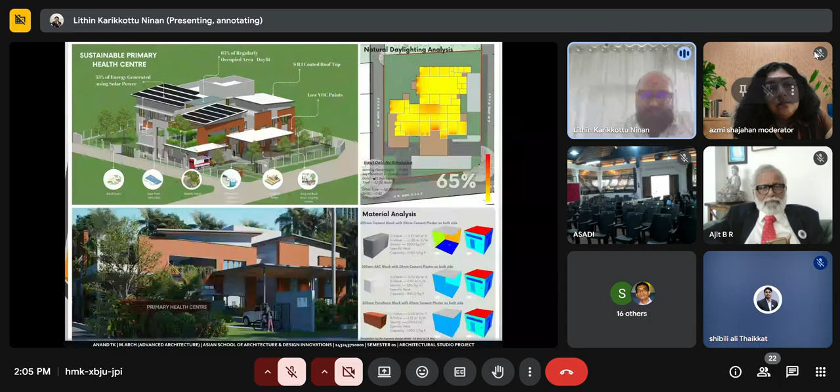In the second semester, it was more about designing the Cochin Muziris Biennale Pavilion. Our design brief was to design something recyclable and disassembled. In that semester we focused on computational design and parametric tools, where we were able to play with our form and try out different combinations in Rhino and Grasshopper.

So these are certain imageries of what we have done, bits and pieces of the works. I am handing over to Basil, he'll be presenting the rest.

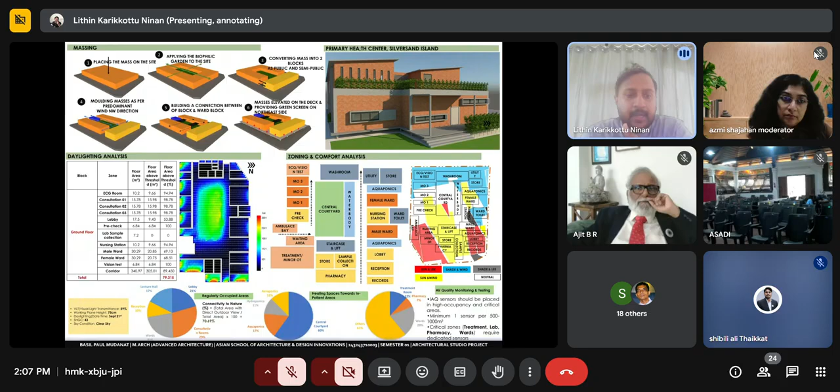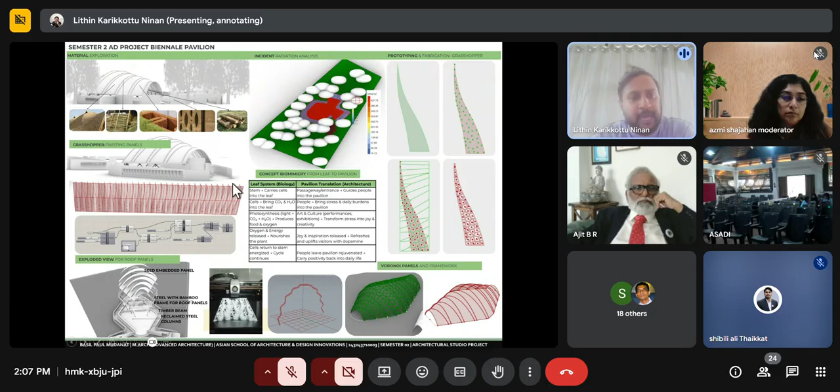This is the second semester project, the Biennale Pavilion, focusing on disassembly and using sustainable materials. As you can see here, the materials were thatch, bamboo, seed-embedded panels, and timber paneling. For the parametric area, I used Grasshopper to create twisting panels where visitors can go through and enjoy them. And these are the Grasshopper scripts.

Coming on to the incident radiation analysis, where the site is daylit or not. So my roof was red in color, where I have provided the Voronoi panel system as the parametric design. My concept was biomimicry, from leaf to the pavilion. As you can see here on the right side, which is prototyping and fabrication, I have divided the roof into 17 panels, placed as seed embedded panels.

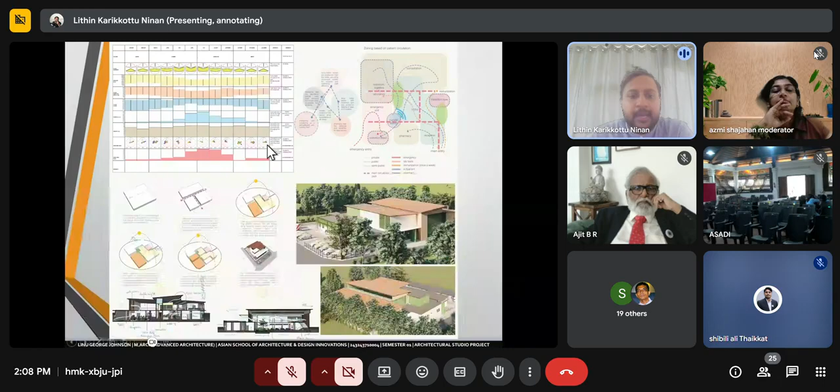So this is one of our students' work. As you can see here, the echo chart for the site analysis, we have used daylight and ventilation strategies for the design. For the IGBC criteria, we have used comfort analysis and CFD, computational fluid dynamics, and daylight strategies, and water demand and power demand.

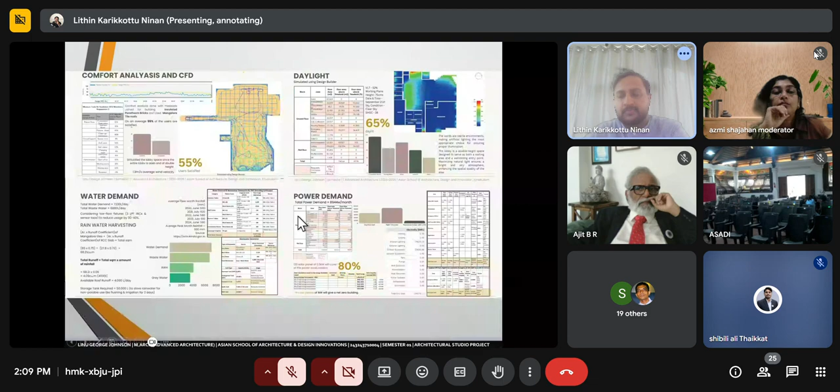So myself, Lithin, a recent graduate from B.Arch from ASADI itself. I joined the M.Arch program immediately within the span of 1 month. It was a huge step up with respect to my classmates who are much more senior to me.

With respect to the projects we started in the first semester, we dealt with the urban primary health center. We used simulation softwares like Autodesk Insight as well as Design Builder to simulate existing conditions with respect to climate, temperature, precipitation, as well as design development based on a sustainable aspect. In terms of sustainability, we looked upon the carbon neutrality of the building, and the amount of solar panels that can be achieved.

All this analysis we derived from the simulations. Carrying over to the second semester, it was an integration of sustainable practice within the domain of parametric tools. We came upon new tools like Rhino and Grasshopper, designing starting from geometrical aspects, even the zoning aspects, with parameters set based on constraints. This is how the conceptual development is made, trying to develop a framework, so the design is not just lines and curves but based on these inputs. Then iterations are carried forward throughout the entire process. The entire structure was developed using Rhino and Grasshopper, as well as simulation tools within Grasshopper like Honeybee and Ladybug, to simulate the required temperature.

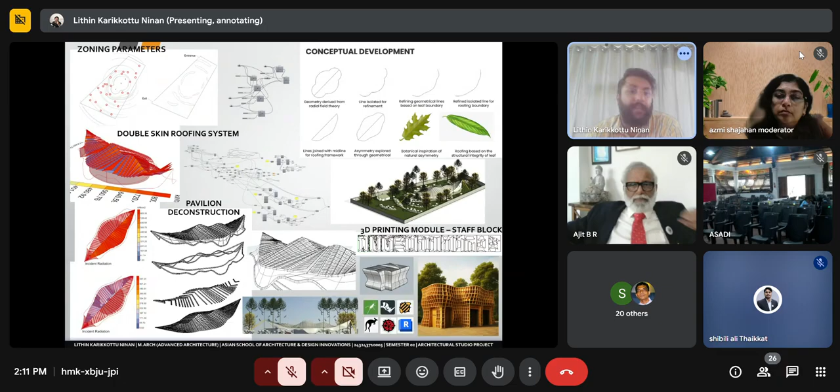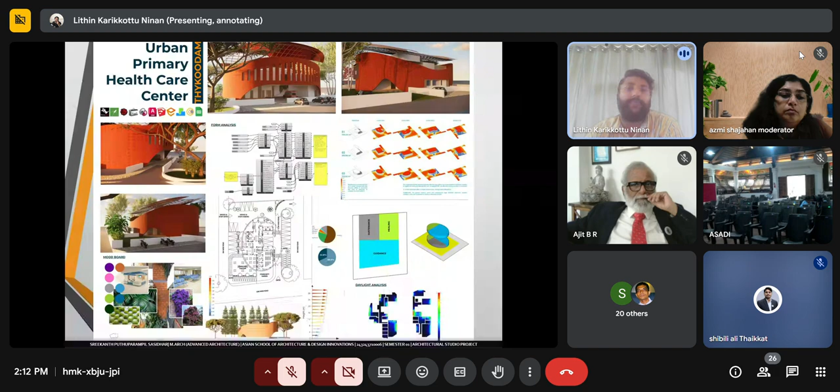Now this is another of our classmates' work, Mr. Sreekanth. He developed the primary health center based on aspects from Grasshopper as well as AutoCAD. With respect to that, thermal analysis was also created, as well as the truss system developed within Grasshopper.

This was a recent project where we had to develop the facade for our institution, ASADI. It had to be a combination of facade plus student pavilion with respect to smart materials integration. I carry forward to Azmi for the rest of the presentation.

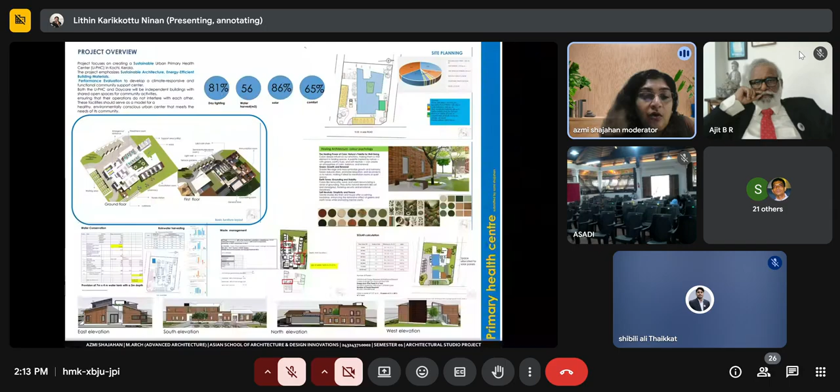Can you please go to the next slide?

This was our second project, a pavilion, the Cochin Biennale Pavilion. We had a process where the whole thing was looked into with a literature study, then a live case study. We had to make inferences on it, then get into understanding the site, which was the Cabral Yard in Fort Kochi, because it has a historical context. Please go to the next slide.

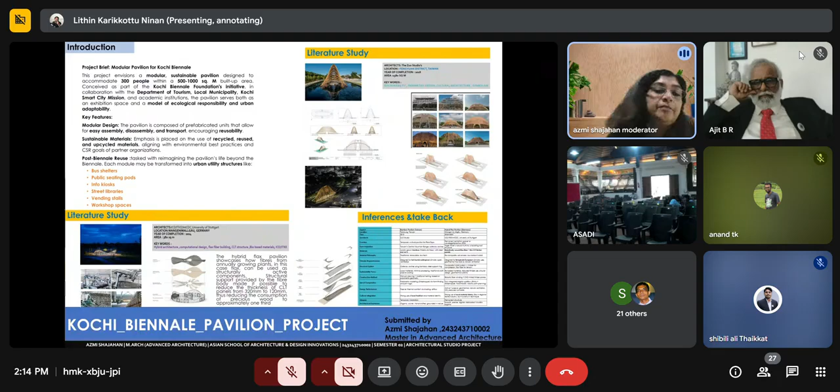So the site analysis was done using parametrics, Ladybug was used for the site analysis, and then after that we worked on our concept. The concept I had taken up was of a millipede, and you can see how we integrated biomimicry to make the form.

So in this one, the parametric basic form of the millipede is what I took as the basic concept. I had those shell structures made with 9 panels, and all 9 panels were scripted using Grasshopper.

The good thing about this parametric design is that you have the flexibility, unlike SketchUp, to move all the panels in whichever direction you want and orient the building in the right position. So you have scripts that enable us to find the positioning of the building on site, using something like Galapagos.

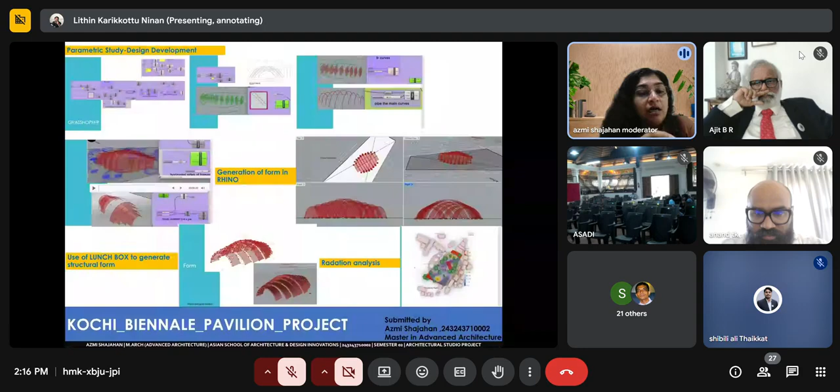So these are some rendered images which I did in Enscape after the whole form was done. This was basically a pavilion which can be disassembled, so it was to be made with sustainable materials. Jute was looked into, so we had to do a little bit of research on the material aspects of it.

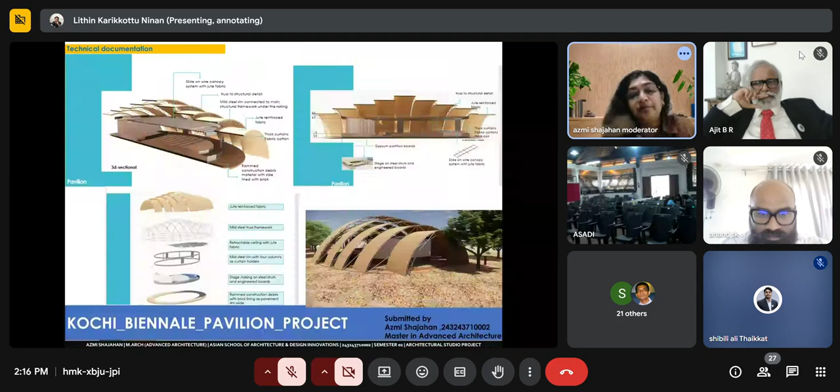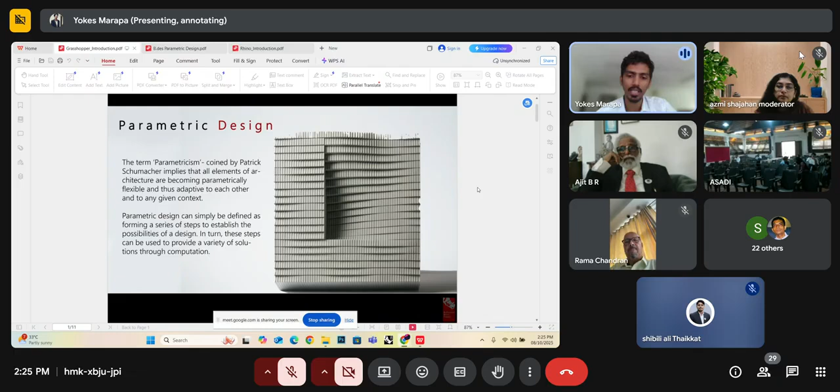So that's where parametric design comes in. Like I said, it's not a newer term. Since there wasn't already a community, it wasn't actually given a name. Patrick Schumacher, who coined the name called parametricism, is one of the partners of Zaha Hadid. He recognized the community, and gave it the name, saying we have a community and we have to put it forward, make it visible for everybody, something like that. And that's where parametric design was born.

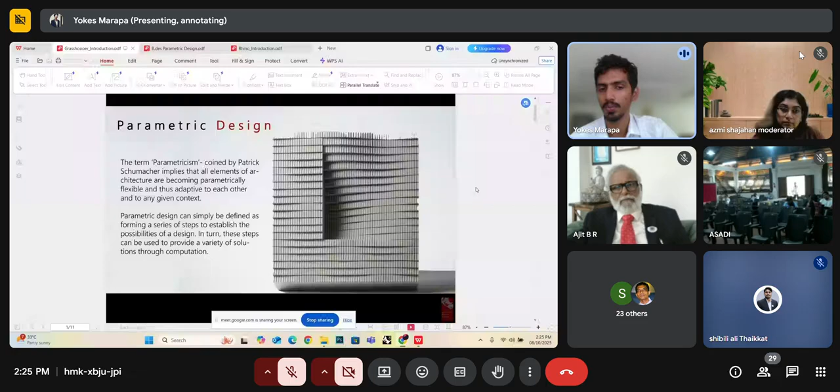So we'll see how it has been traditionally made. We have our conventional type of designing, and a parametric way of thinking. So what is our conventional way? We get our design problem, we make our site analysis, gather literature studies, case studies. Then once everything is done, we go for standards and everything. We get the design problem, work with the conceptuals, make 2 or 3 iterations of the same design concepts. Then when everything is approved, we go for the approval drawings, and then construction.

But when it comes to parametric thinking, the amount of data you're getting is always more like a variable. Maybe the same amount of temperature you record in a single day is not the same on another day. Maybe in summer you record a lot of radiation, and in winter you record very less radiation but more wind. So for a single year there will be a lot of change.

It's not static, we can say. So we have a choice, sort of. Either you can have an optimized solution for everything, maybe a single solution, or you can have a variable solution. Maybe for the first 6 months, the window will be facing this sort of direction, and the other 6 months it will face another direction.

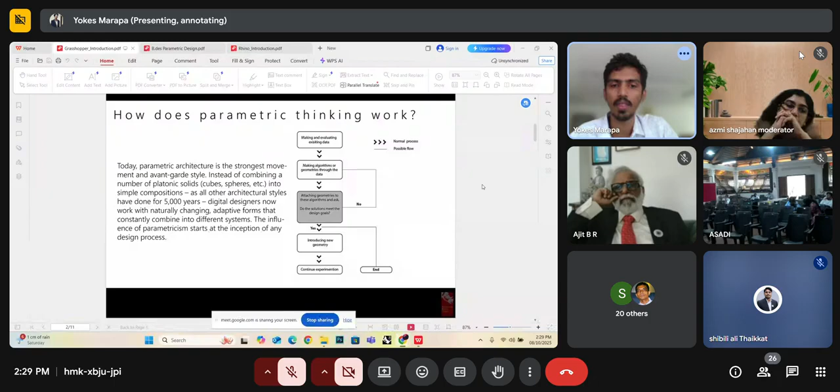What are the different types, we can say? There is constraint-based, propagation-based, and generative-based. Constraint-based is our typical conventional style, and propagation-based is where we use parametric tools like Grasshopper or Dynamo.

Some parametric tools support our design workflow. Generative systems are like when you go toward the AI field—you give all your parameters to the system, along with all the data, and then ask the system to give you the optimized solution. The system analyzes using its own machine learning, and they have their own neural system.

So it's not like they have their own—we have to train them. There are different systems helping these generative systems. So we train the system first, and give it all this data. Once that's done, you can get all those generative forms and so on.

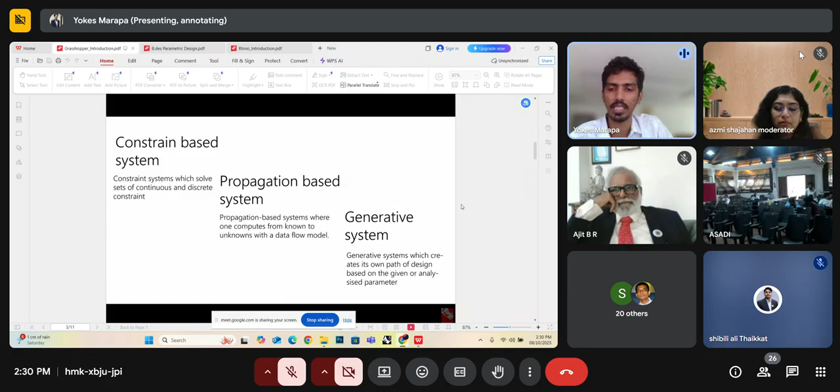And what are the tools now? It basically depends upon the market—every system has its own tools, every company has its own form of parametric design. McNeel has Rhino and Grasshopper, CATIA is from Dassault Systemes, Autodesk has Revit and Dynamo, and Blender also has some parametric capabilities. Houdini has some parametric work, and Fusion 360 has it too.

So every company started to adopt parametric work since it breaks our regular conventional form of designing, and gives more flexibility for designers to rework their design and reimagine their forms. Using the same traditional construction methods or fabrication techniques, what if you could go a step further? Since the fabrication industry has grown a lot, you can now make any type of organic shapes. So many different tools have been formed.

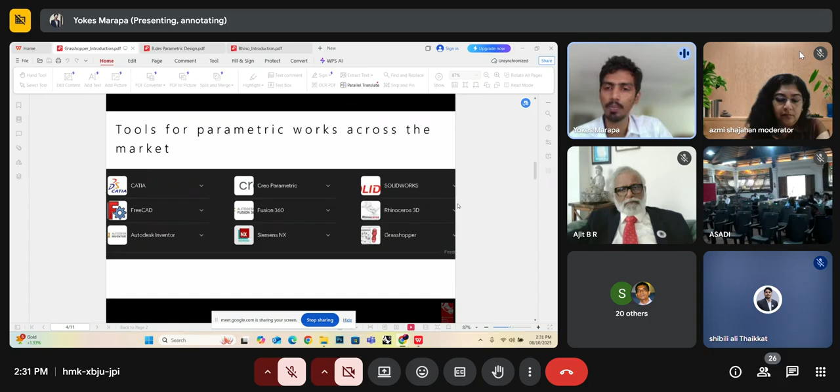So where is it being used a lot? The current technique is mostly used when you're going with parametric forms—it's widely used in facades. But right now it's not restricted to facades. There are many other forms too, which we'll see.

How parametricism is being used in every discipline in architecture—so if you're into fabrication, how parametricism is used, how digital architecture changes itself, and if you're into sustainability, how they are using it. We'll look at each of these disciplines.

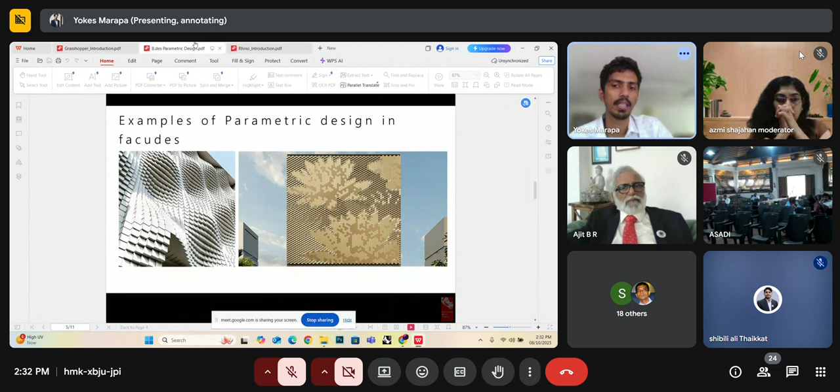So why has it been used and what are the fields? It's been used a lot. Any type of design-oriented field, we can see the parametric logic and all. Architecture and design, it's almost everything the same. Design doesn't mean you're restricted to just interior design. Even automobile designers, navy-based designers, or footwear designers, all those types of designers have started adopting these parametric forms.

So why it has been largely used is the number of iterations you're going to make. With any typical conventional style, you can make maybe 10 to 20. So the number of iterations can increase your productivity. And as you increase the iteration style, you're automatically generating your drawings also. So it goes with customization and optimization, both of these.

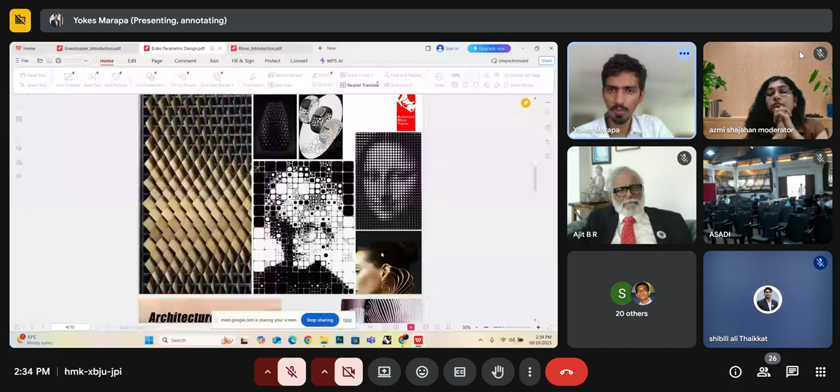Next, product designers use this in fashion and all fields associated with design, you can see parametric forms. You can see facade images being used, artistic images, reasons like the iPhone, the Apple Watch bands, and all. If you see those textures, every automobile industry, even newer EV cars like BMW, MG cars, the case plate, everything is being made into more futuristic forms where you can see parametric work.

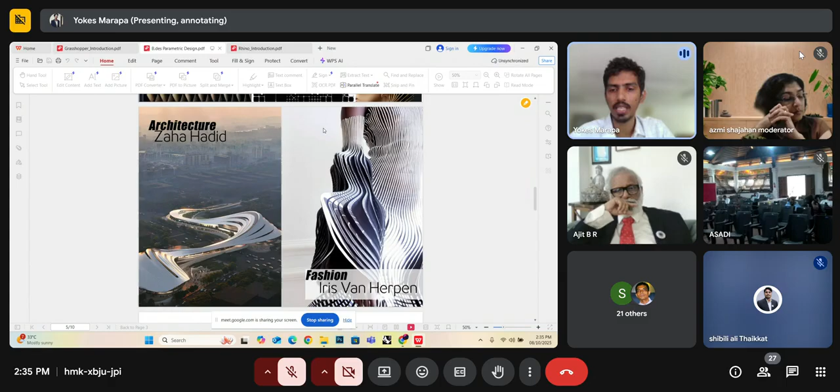For example, who uses this in the industry - for architecture, Zaha Hadid is one of the pioneer names, but these are all people who have their own form of creation. Many people have their own style, so they created their own style.

That's all. And why using parametric design gives you an advantage over conventional style is that you're breaking down every form into codes digitally. So just like how you'd make forms in SketchUp or anything - first make the drawings, then make the 3D model, then apply textures and materials, design it accordingly, and then present it.

If you're using the same technique, what you're doing is creating a digital twin basically. Before going for any real-time construction technique, you create a digital twin, and then you prepare yourself, you quantify it. When you're able to quantify it, you can give more mathematical evidence. That's all, it's more like a tool-based system.

If you're using SketchUp or anything, it's not like you can't follow parametric design in other softwares. It's considerably steeper, the learning curve, but once you get a hang of it, it will be more useful. So let's say you're using Grasshopper or something, and you're making a building, or a facade system, or any type of building system associated with parametric forms.

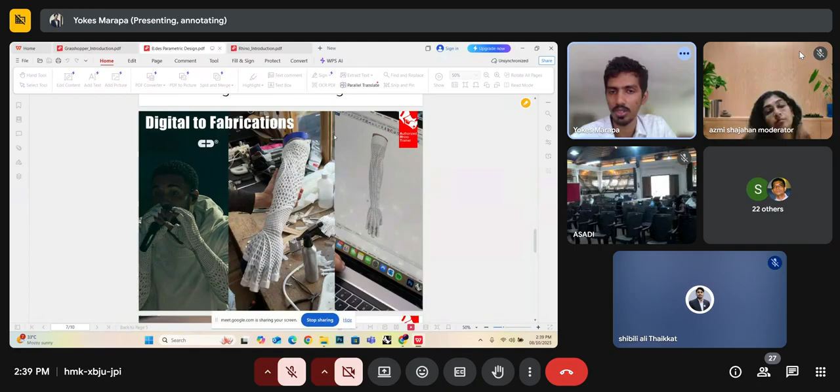So you can see a glove which has been made entirely through parametric design. First they make the mold 3D printed, then they make a silicone mold of it, and it's fabricated through injection molding. You can even make wearables using Rhino and Grasshopper.

So basically, you have to make logics. You have to find the math behind it - what is, and how every geometry reacts to, and everything.

We usually leave our logical thinking behind after 11th and 12th. Once we go too much into the design part, we start losing the connection of how every geometry is forming.

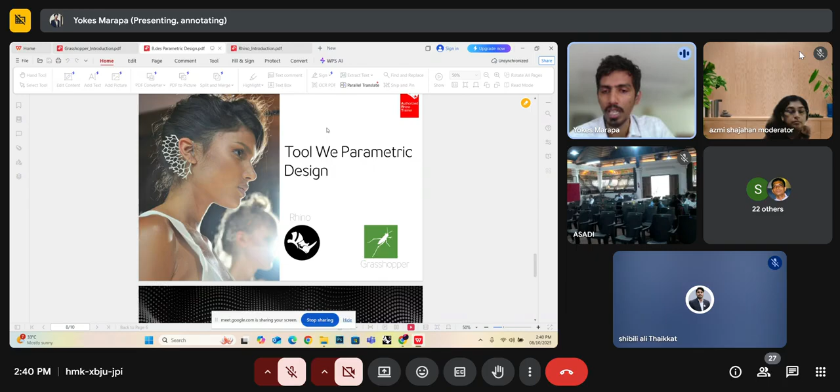In our style we usually consider how a space feels - our measure is the emotional connect between spaces. But even if the emotional connect is there, you can always give it a proper mathematical value. In that form, parametric architecture will help you a lot. So you always design with logic, but also bring in your aesthetics.

So how you're going to use Rhino in our own AEC industry - how it has been adopted, how well it got used to in our AEC.

Architecture was never software based or something. It was totally dependent upon how a person feels the space, how an architect creates the space in his perspective, how it adapts to the space, how much emotional connect it creates - all those things. So what if you can still follow all those things?

You can make more shapes, futuristic effects, and still form all those unimaginable forms. It's not just about knowing the tools to make all those forms.

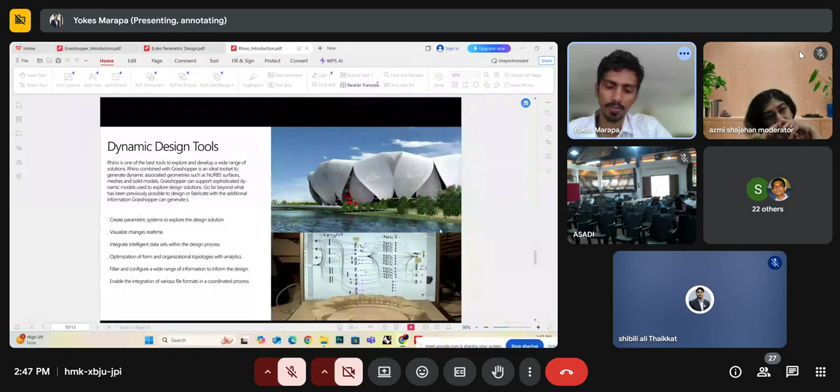He just needs to know where his ducts are going to be, and he doesn't care about all of this. He just needs to know where our AC points will be, where our electrical switch points will be happening. So he'll be working in a different set of drawings. Our HVAC systems discipline will work in a different system, a different sort of drawing system.

So there needs to be a single form where all these models have to be combined, and then each one can relate to what they are doing, and then they have to check it also. So there is something called the quality of the model also. You can assemble everything in the BIM world, maybe in Revit or something, then you can check whether everything is colliding or not in software called Navisworks.

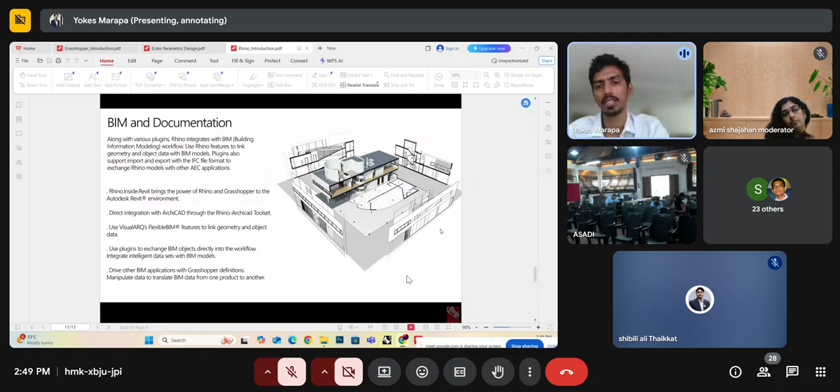So you can have a proper documentation also being prepared in the BIM system. When you're working with more forms, not only forms are important, the recording of your modeling is also important. Once it's recorded, then you're not going to be sitting in the same single building, right? So once it's completely recorded, you're publishing it or giving it to the client. It has to be in a full complete set. This will help you run and maintain the building also.

But the design part will always be there because we are designing for human beings only. We're still not designing for robots or aliens or something. So since we are designing for ourselves, it will be totally human based. Until the user of the design changes, the person who designs will be a human. So you have to know where you're using your efficiency. If you're going to use your mind in designing, you can keep designing, and then let AI do the work for your production drawings or BIM manipulations. But if you want to work in production and don't want to design, then you can ask AI to help you with all those forms.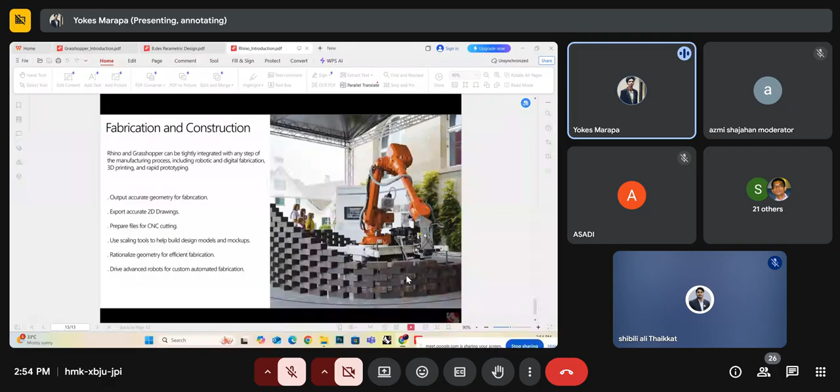So how you communicate between robots also, you can still do everything within Rhino and Grasshopper itself. You don't have to go to many third-party software, or learn separately - you can just add everything, upgrading as you go. You don't necessarily need to know exactly how the robot works, just the basics of how the robotic arm moves, and you can keep doing whatever you're doing.

That's all. So the major advantage in the fabrication industry is with Rhino and Grasshopper - not only do you make your design and production drawings, you also send models of how to make everything for production for robots also. So it acts as an intermediate, like a skilled labor.

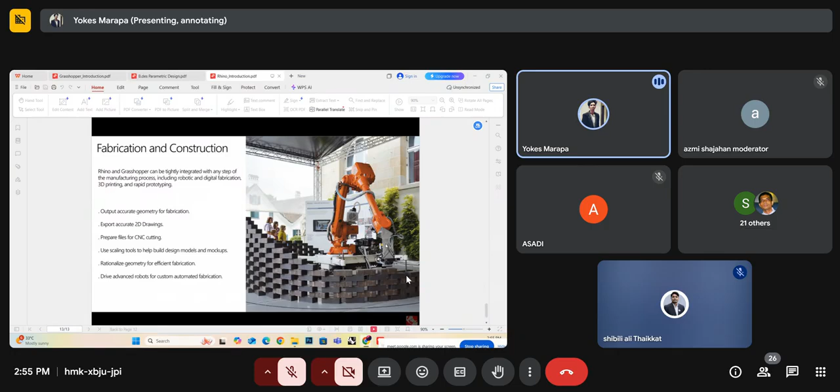So let's say you want to place bricks in a particular way, and you need skilled labor - you need to train that person for a few weeks, keep a supervisor, and visit yourself to check whether the work is going properly. In those cases, you can just hire a robotic arm, and whatever design alterations you're making live, the amount of time a brick wall of 10 feet would take in a very parametric form might be a week or something. Whereas if you bring in a robot, it can hardly do that in hours.

That's all. So it depends upon how much efficiency you're going to get, and how much returns you're going to get. That's all.

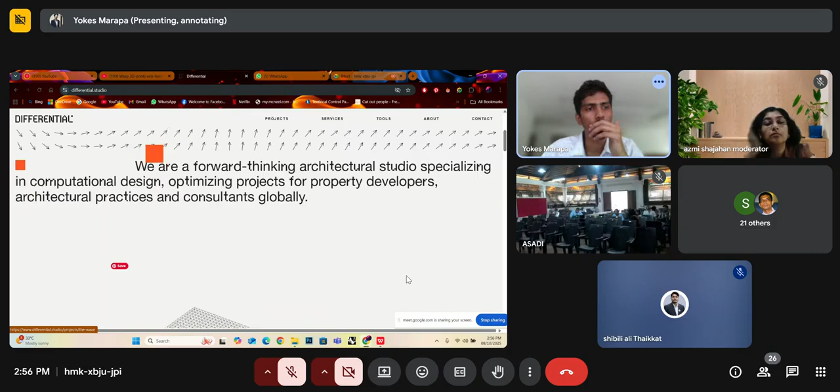And so we'll just see some projects where it's being used a lot, where they're using Grasshopper or any type of parametric tools. You can see there is a studio called Differential Studio in Poland. Even their web page is more unique - you can see all those crazy stuff they do. In one of the projects, we'll just see.

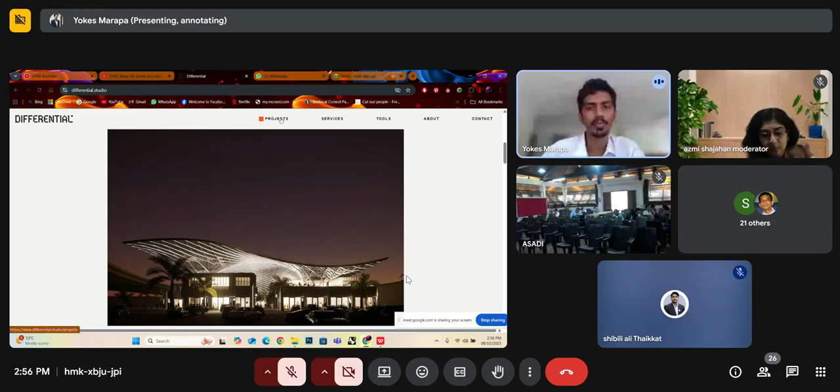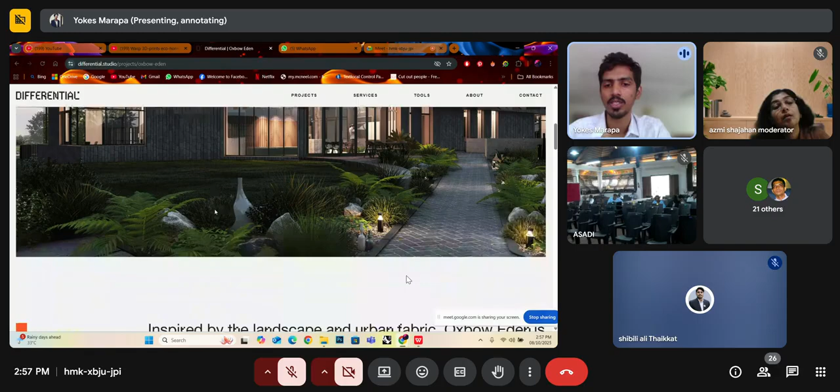Yes, this is the building. Even the website has this old pixelated style, and then once you go into it - once you go into this parametric world, the modern form of architecture, you will start reimagining the way of presenting it. It's more like about how much data you're going to show.

So it may look like, okay, what is so different from any sort of construction? What differentiates itself is rather this unusual sloping roof. What makes it so different?

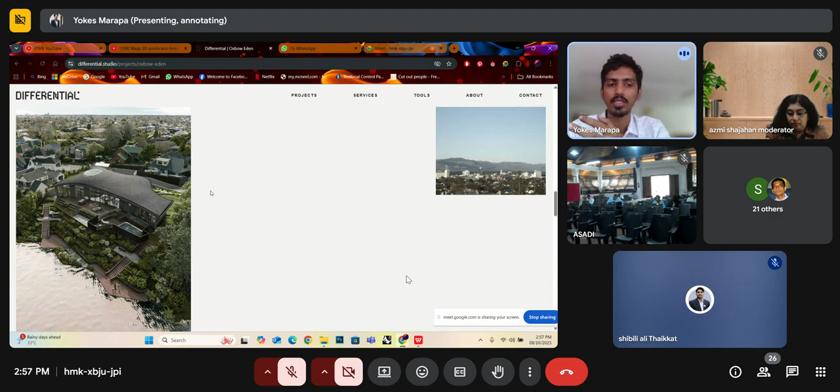So you can see they made thousands of iterations of the same building module. The first layer is the area, showing how each and every space has been defined, with respect to the amount of daylight that enters into the building.

So the form is being generated in a totally generative way. Your form is generated based on the amount of daylight you get into all the spaces. Every space, you can see live, each and every room space has been changed and tweaked a lot.

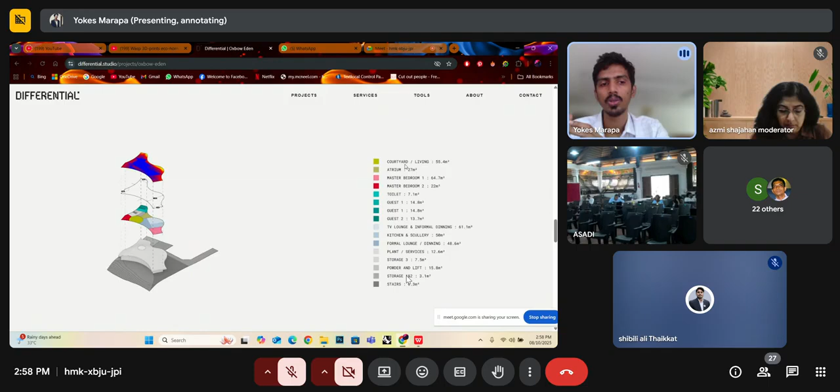Everything is generated by the learning within the software. The amount of sunlight you get throughout the year is calculated, and then it starts generating the room spaces accordingly. Once everything is done and you're satisfied with the form, it starts creating the roof layer.

Once the form has been fixed, they made the analysis for CFD, which is the wind analysis, and how much radiation the building creates to the site, and how much daylight you're getting inside. Once you're able to quantify, you're able to get visually what is happening now.

It is easier to add more. Here, let's say the blue areas are the areas which are not going to get daylight. So in the blue areas, now you'll be adding more lights.

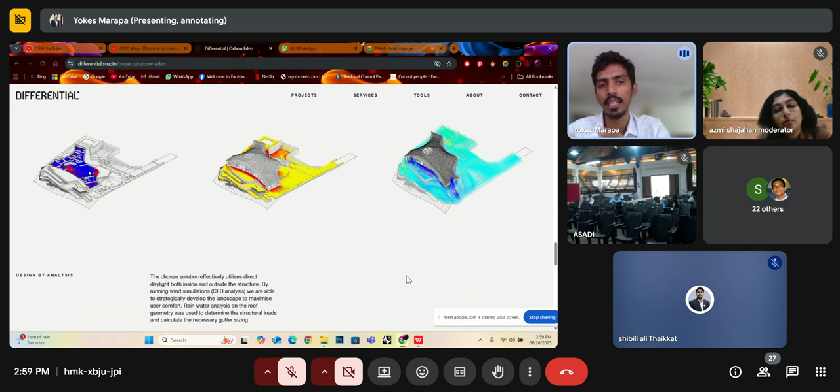So how much light, how much wattage of lights you'll be needing, you can start quantifying. These areas will never receive daylight, so I have to turn on my lights even in daylight, meaning the amount of energy it's going to consume. You can actually quantify how much energy it's going to consume, and then give the running cost of the building per month or per year.

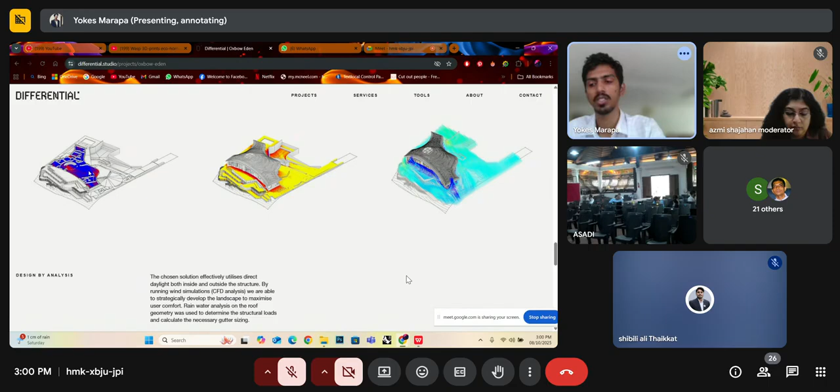So you can actually calculate, down to the numbers, how much it's not only going to cost you to build, but how much it's going to cost to run the building also.

Next, they have a few more projects also. I'll show, which is the Wave.

This one, I guess, is just a flexible market space where they have 2-3 blocks or something, but all that space has been combined under a single roofing system.

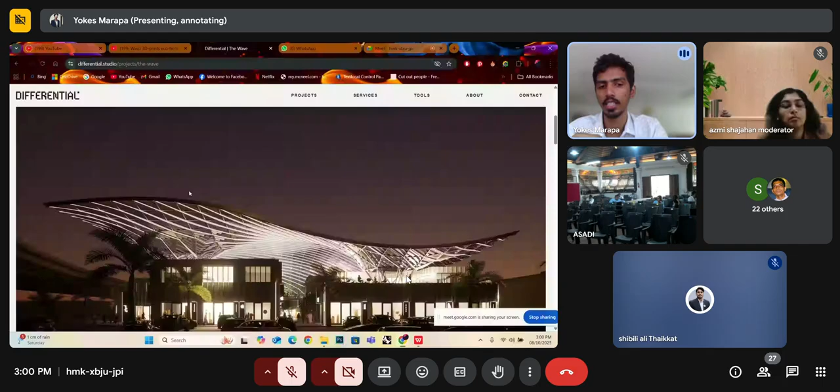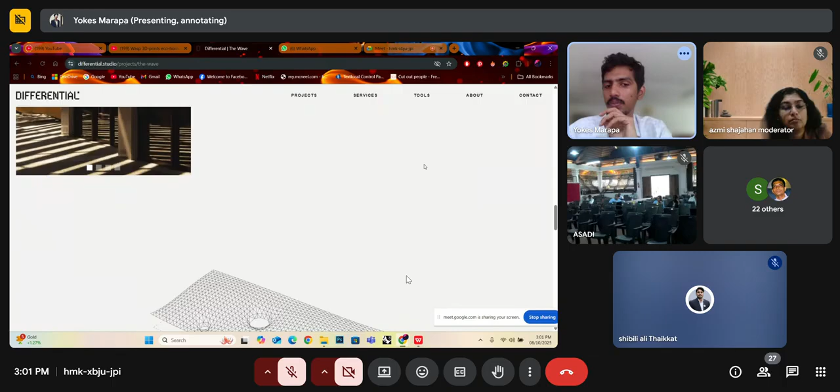So they have a native Kuwait market. What happens is the concept is brought from the Kuwait market itself. How it is made is they'll have some small blocks, but it will all be under a single big roof. That's all. So they took the same concept and started creating a simulation.

They simulated it first. So you can see these triangular frames, your structural elements, and how these frames transfer your load system. You can see how these frames are actually constructed.

Some 4 to 5 larger blocks are made, and how this roofing system supports them. So how much of a shading system you can make, how much energy and load is being transferred, everything you can figure out before you go to construction.

So not only from an architect's point of view, but also from a structural view, you have to work in parallel. You can't just make the form and send it to structural to make it work. Both structural engineers and architects should work more parallel and make it work together.

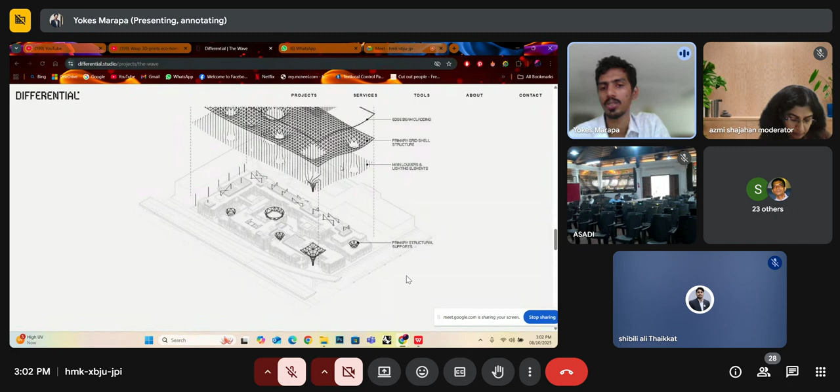That's all - how much radius, what strength of steel, what width of steel you have to use so that it supports such a bigger roof. All those things we can calculate before going into construction.

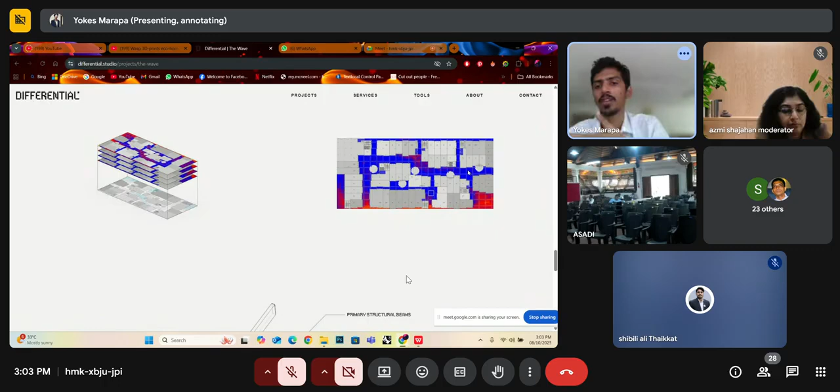So again, you can see how much sunlight each and every room gets. Every floor is assessed, and once that's done, they calculate how much extra lighting they have to add. Then they start analyzing the energy part of it - how much energy it needs to run the building.

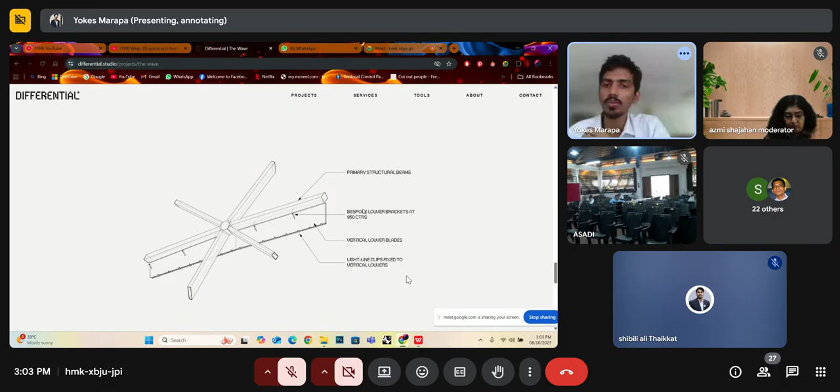With a non-traditional form of design, the structural system also has to be created uniquely. You're going to have a very unique piece, meaning even all the structural joints have to be made on your own. So every structural unit will be different, and the molds for every structural unit will be different. You have to manufacture the molds and manufacture each and every structural unit. So if you're going to have a unique problem, the solution should also be unique, right?

So this is an overview 3D model, I guess they have made. This is some simple, unique form which is being made.

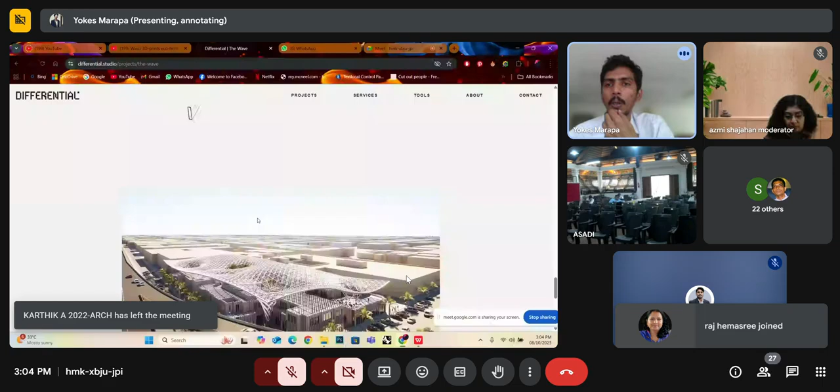So in the last one, when I mentioned how robots are being used in the industry, it's not too far. Europe has already been using robotic fabrication and construction in the past decade. India has also started using it. I guess in the last 2-3 years it's been used on a very large scale. So it's slowly coming into the commercial field also.

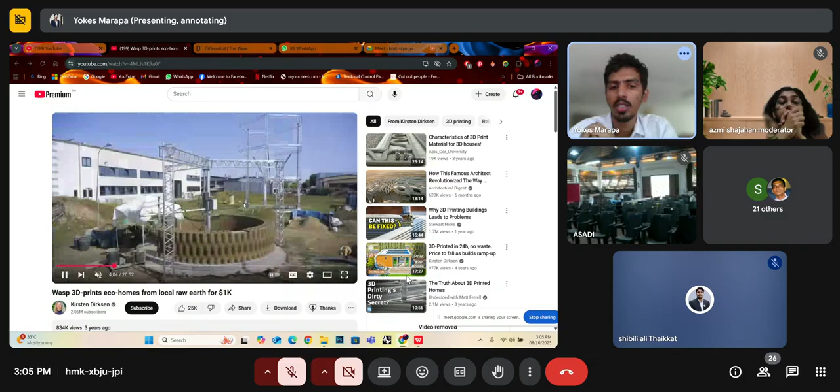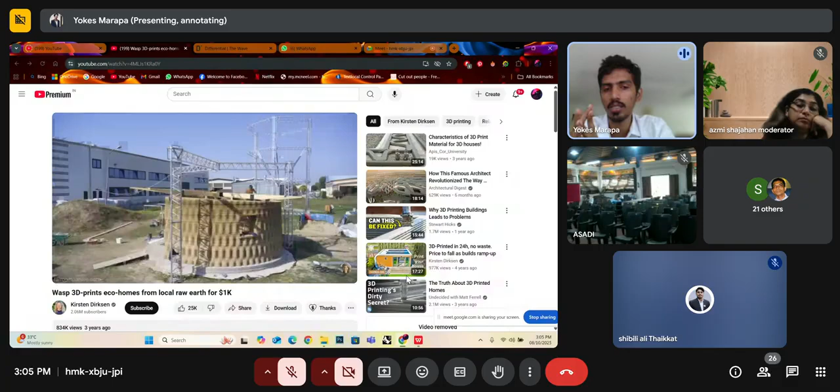I'll just show you an example where it has been used commercially. I guess this is in some part of Europe only. A residence is totally 3D printed using clay. It's the similar technique that has been used for any type of 3D printing which we do in our conventional style.

You can see a bigger frame here in the backside. This is our extruder where they are going to print it. This is the form. What they do is they assemble the printers first, then print within that form. Within a day's span, you can see them raising a single block.

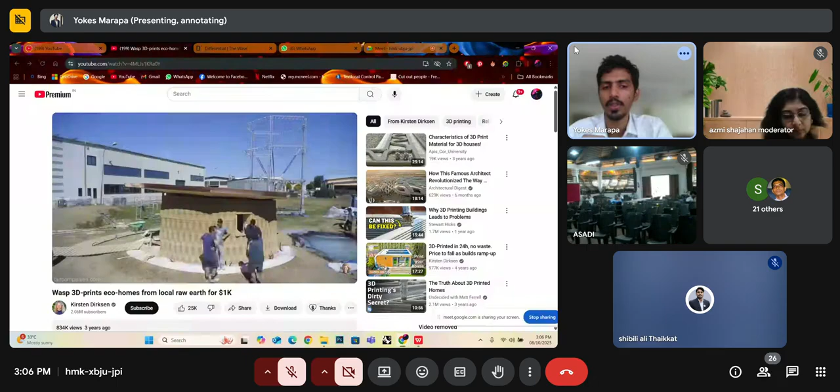If you're going with more precast or fabrication techniques which are conventional style in the current market, I guess that will be cheaper maybe. But how much is it going to affect the environment? Let's see how this is going to affect the environment. Since this is made in clay, and more of the materials being used are from the site only.

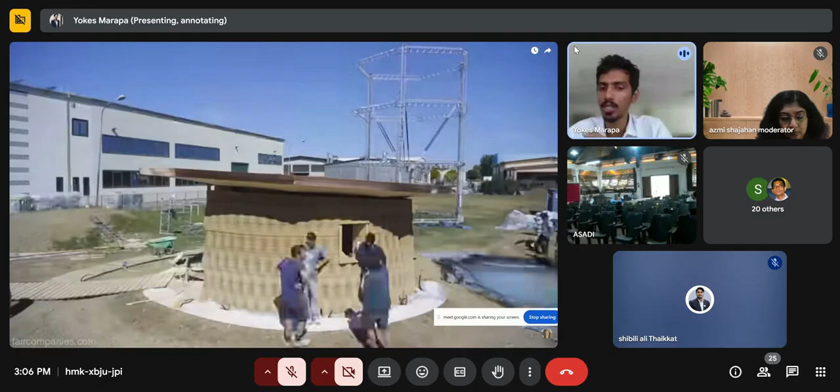So now what happens is you're reducing the energy which the building consumes, and now it can adapt to higher degrees also - what temperature it can withstand more. So the materials being used are also more native now.

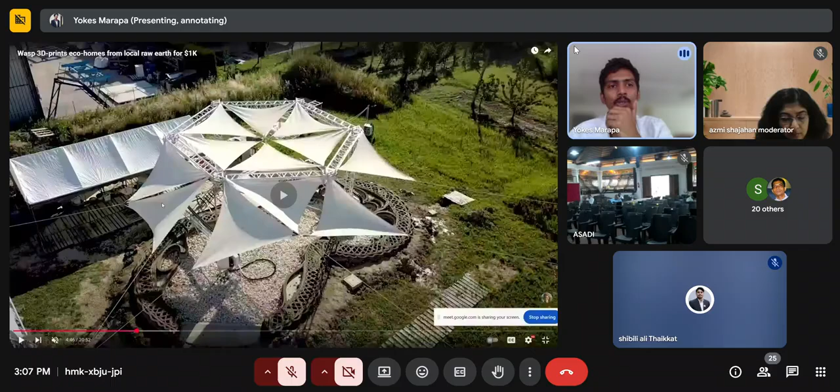So now once this is made, I guess they made one more project here too, you can see. This is the printer which helped to print this building. You can see a very larger printer, there is this one. So they pump in those materials. This is one more residential unit which they made. You can see this whole building - what they are going to make costs under $1,000.

Which is less than an iPhone. When you're going to make residential units which cost maybe less than a lakh or something, the affordability range becomes a lot. I'm not saying the R&D which they have put in, and the amount of money they have put to make the robot and everything - that will be in a very higher range. So as designers, what we have to look into is what kind of materials we are going to use, how much creative solutions we can give with the available needs.

That's all we have to look on. So now you can see the thickness of the building - if you're going with a regular stone wall or brick wall, it will be more than 2 feet or 1 feet.

So when you're going with a more solid wall, what effect does that give? How much radiation can it absorb or something. Now when you're printing with some gaps in between, they will start giving you an insulation effect and a more acoustical effect also. So now it will start creating...

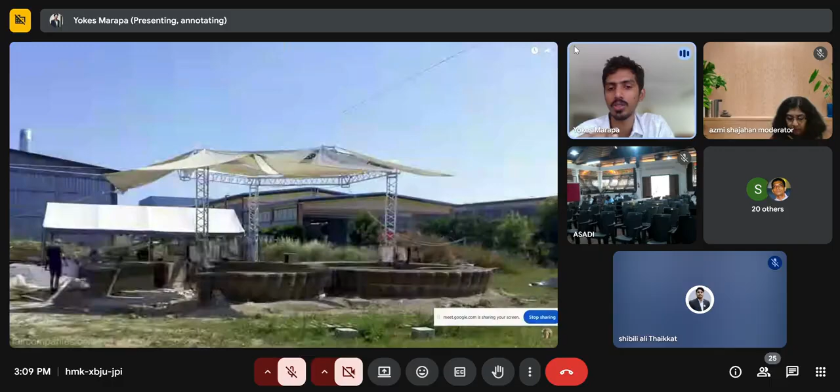So how it structurally stands and everything. So all this has been done in some 200 hours or something. Within a span of a month or so, they completely finished this building, which is entirely done in clay.

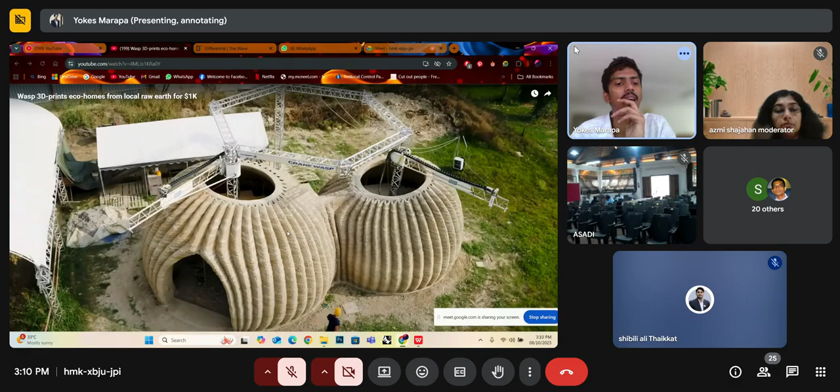And that too under $1,000, which is less than maybe 80 to 90K. When did this video come out? Three years ago. Now it would be more or less 30 to 40K. So basically it's just the material cost, that's all.

Whatever material, and especially if it's available locally. The same clay and mud is used, and then to give it strength, they mix in cement. That's all. So it's about how this material reacts with one another.

You have to identify the material first, what kind of material is traditionally used in that area. Maybe the same material is used for plastering the inner areas, but you can make the whole building with this material.

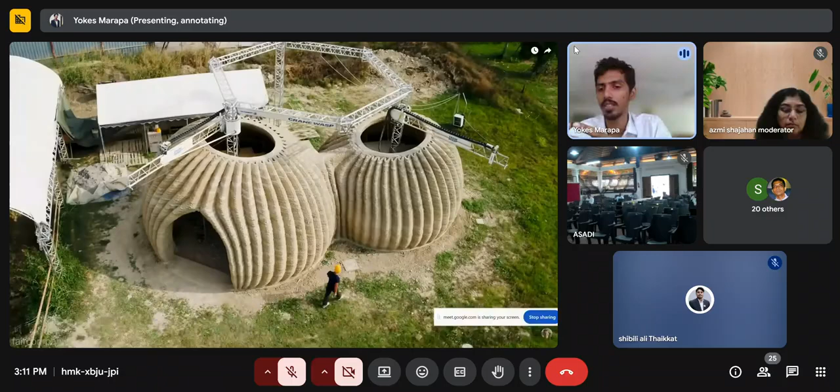The infills, so the patterns you see between the walls, they call it infills. The infills you use between the walls determine your insulation and acoustics forms. You can control your infills, or how much radiation effect you want to reduce. All those things you can do in your design process only.

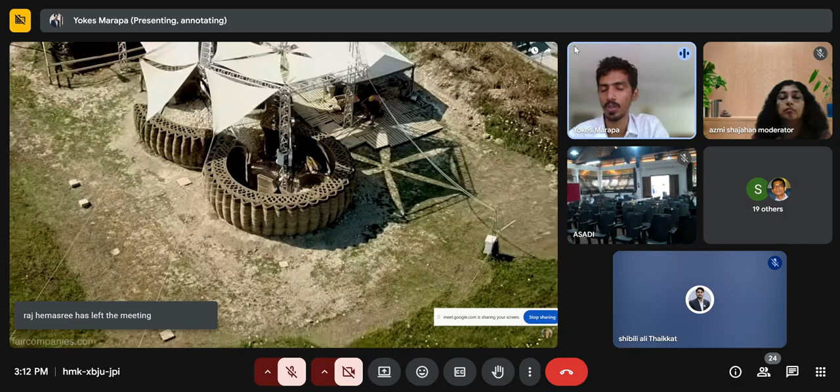It's just that the form doesn't naturally come. You have to start experimenting with the forms, and then you have the freedom of experimenting now more.

So you're not restricted by software skill. Now whatever you're planning to do in softwares, you can always recreate everything with the current generation using 3D printers, CNC milling machines, and everything. So all these things come into a package sort of. You don't have to learn a different software for 3D printing, a different software for CNC milling.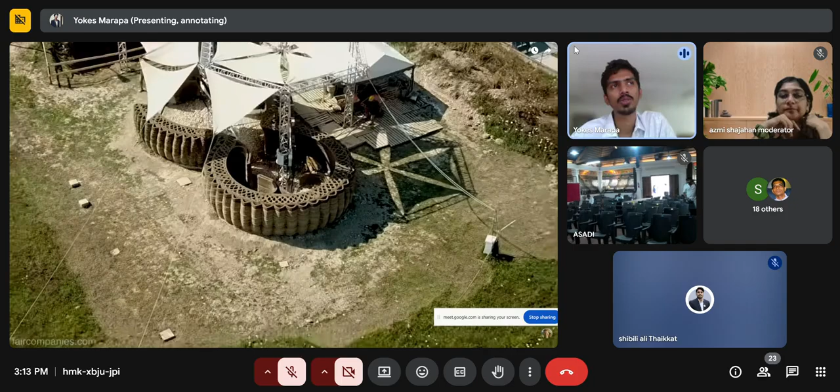A different software for handling robots, a different software for handling BIM. Everything is combined into a single package when you're learning in Grasshopper. You just need to know how to basically code. That's all. You have a steep learning curve, but it's not necessary to know everything.

You can always upgrade yourself. So this is what this course offers you also. Know what is in the market first. Once all that is made, you can start creating your own experimental buildings also. You can still have your own style of design, but how you are going to scale it, that is what you can see in this course.

Once all these things are made, I guess you can see. Yeah, oh sure.

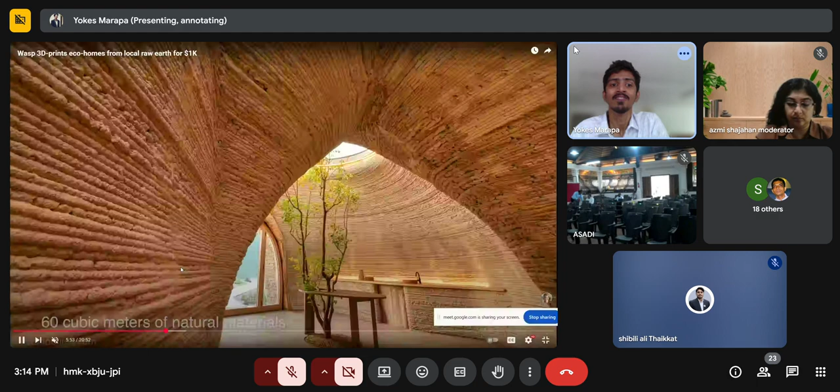The aesthetic doesn't mean you have to have a different sort of interior elements there, different sort of paints and everything. How the aesthetics are different depends upon person to person and architect to architect also.

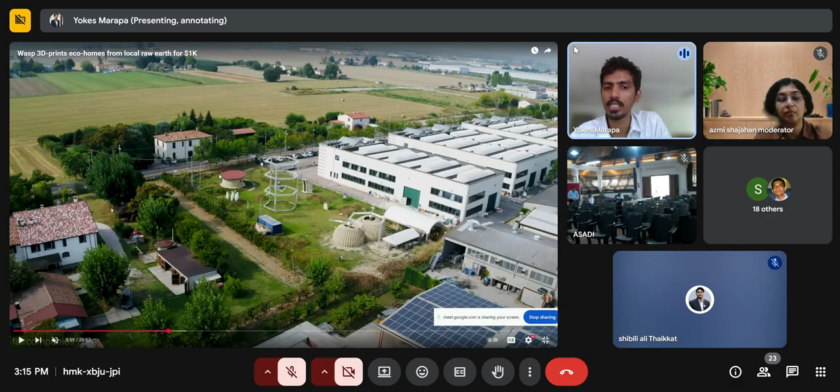You can see here the type of printers is also different for each type of building. Here you can see two types of printers printing at the same time for this module. And for this module, you have a single assembly printer, a clay printer. So it doesn't matter what kind of printer we use.

All the systems or robots work on a single code-based system. Once you start learning the basic code and how things work, then everything totally depends upon how efficiently you're designing that software.

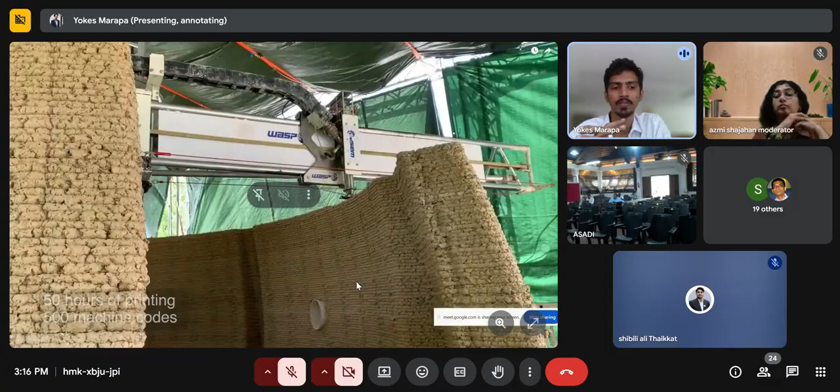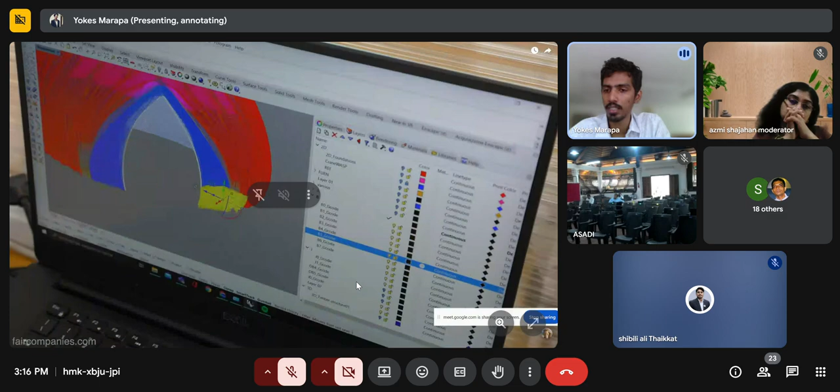And here, I guess you can see each and every layer, how each and every layer has been printed within this manufacturing unit. So what they do is it's again a more precast system based sort of only. Either you can print in your factory and then bring it to the site, or what they do is they directly bring the printer to the site, and then whatever materials have been available, they feed it into it.

So here you can see the person is actually adjusting all the infills, whatever he is doing in Rhino and Grasshopper simultaneously. So what they do is they don't hire masons or any skilled persons to build the building there. Your architect is the person who's actually building. The printer is just helping to print.

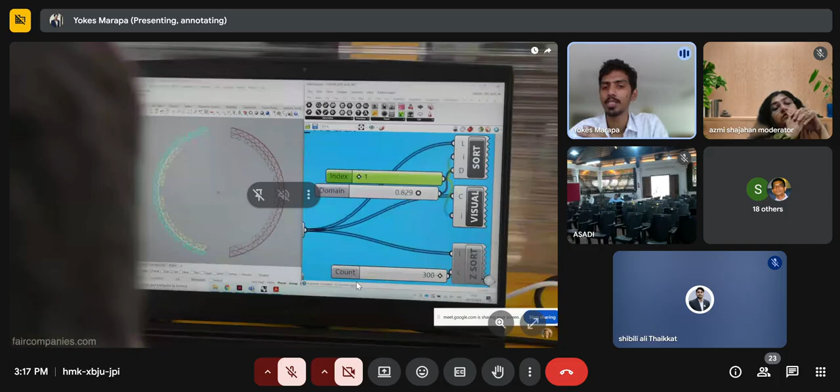It's not like a robot they are using. So you can see here the person is actually adjusting the infills inside it and how much wall thickness he is going to give. So everything is being predetermined within the software scale only, and he's totally in control of what the printer has to print also.

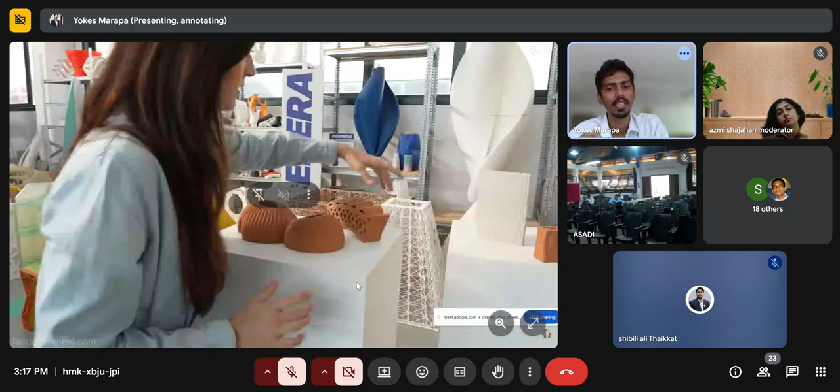So you can see they have their own different types of, they have their own different form variations of the same model. So you have to experiment in a very human scale or digital scale.

You can create an exact one-to-one digital twin, but still, when you're making a physical model and relating that to a natural scale, that will have at least some 5 to 10% variation. So it is always best to create a digital and physical model and then check what our actual data is, and see if it is matching with the physical model. So you can always recheck everything.

So once that is done, you can create your own type of iteration. You can create your own forms. You're not restricted now to any sort of parameters.

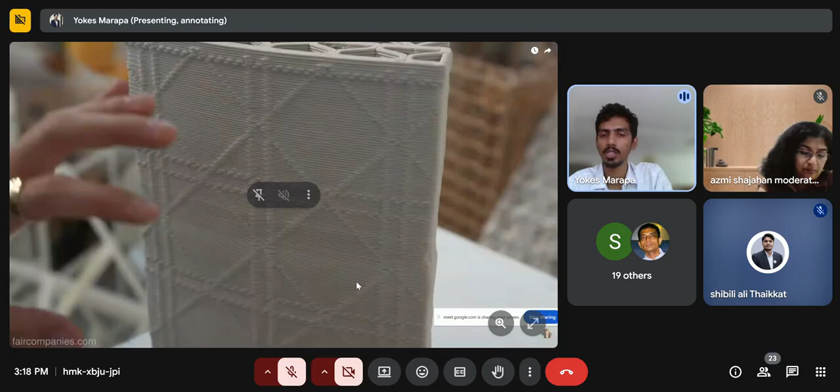So if the location is not accessible, send robots to print it directly. If the construction is not possible, what you can do is make it precast sort of inside a building, and then you can just ship it to your construction site. And what kind of material you're using, again.

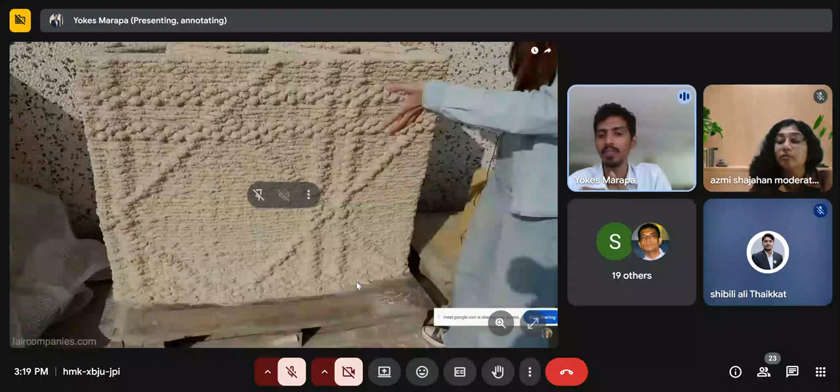So it goes with your sustainability factor again, how this material is going to sustain in your design. So if you're going to use the native and traditional system, it has to blend with the modern type, and then the future type, and then your traditional way.

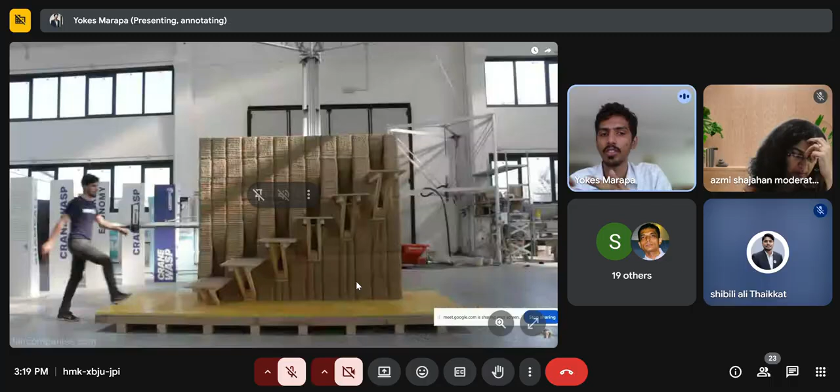So it's not always a more futuristic thought that it will just remain in software and never going to happen. It's not. People started using it, and every time we just need to upgrade ourselves and think about the possibility of it, know the industry and how it is being used, and all.

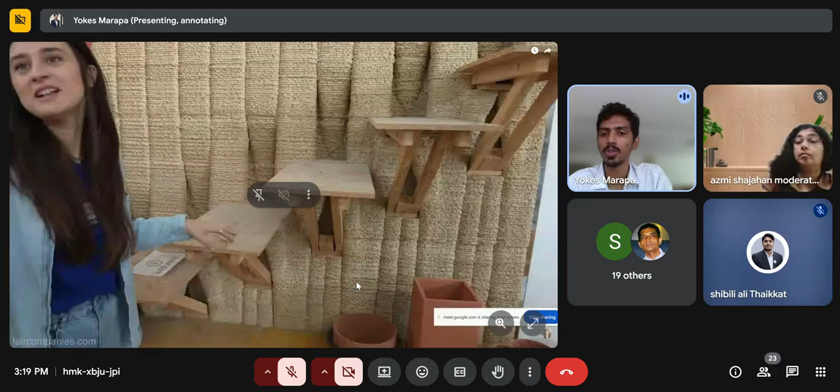Not everything is being restricted now. Everybody now has access to internet, AI, and everything, so you can learn everything now. I guess this course is really a good course also. So once you're comfortable and ready to have the exposure about how to know the more advanced techniques about what is happening in the industry, I guess this will help you a lot.

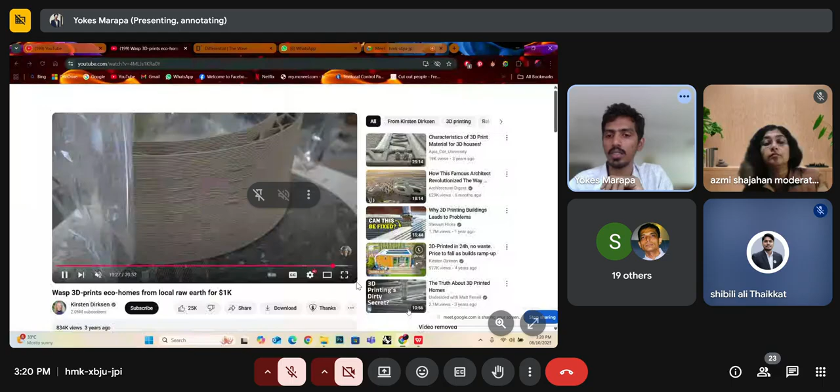So this is almost all we can see. I guess once you guys are into the course and everything, it's all been displayed for students, only the first years. So the more upcoming batches, we'll also try to have more new problems, more creative problems, and how to tackle all the solutions we can see.